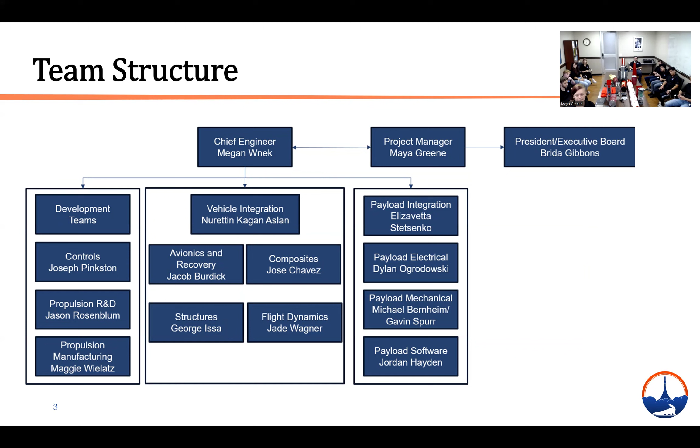Hi everyone, my name is Megan Wnek, and I am the chief engineer for our project this year. As Maya indicated, I'm the technical manager of the project. I'm going to give a broad overview of our project before handing it off to our technical leads to do most of the talking. Just to give a little bit of status on our project, we are on track with the competition to attend in June. We've submitted all of our documentation on time as well as paid our fees. We've also completed a fully integrated test flight of our entire project.

And this was largely successful. So we're currently just wrapping up a few mitigations and fixes that we needed to make following that test flight. And we are slated to be doing our final testing in the next just like few days to be ready for the rest of the summer.

All right, so to introduce our project, as Maya said, the overall title of our project, as well as our launch vehicle, is He's Right Behind Me, Isn't He? And we have a little bit of a theme from The Shining going on. Our payload's name is Here's Johnny, and the payload is a deployable chase camera, and that's where the name came from. The payload is going to essentially follow the rocket and chase it upon descent, so that's where He's Right Behind Me, Isn't He? came from.

And then along with that, we also have, as Maya mentioned, our SRAD air brake, which one of our development teams was working on this year. Again, this was a really successful project, and we flew this on our test flight, and we also are going to be flying it in competition as well.

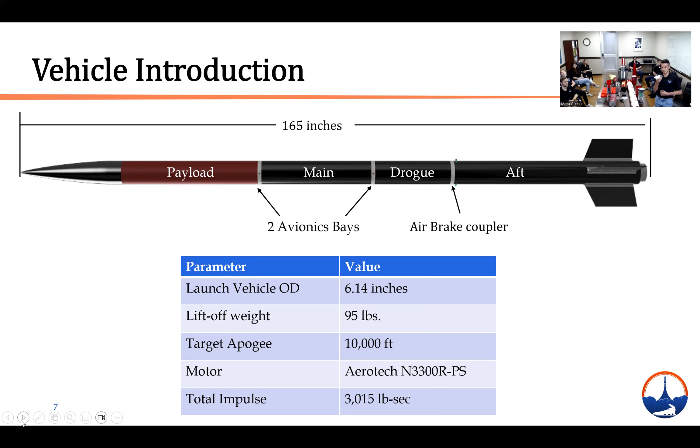Our airframes include a payload airframe, a main airframe, a drogue airframe, and an aft airframe, which are joined with 2 avionics bays and our air brake systems coupler.

For the connection points, our payload sits inside the payload airframe, and the nose cone connects to the payload airframe, creating our first separation point. We use metal rivets to create our non-sliding rigid joints.

We have our main parachute inside the main airframe that connects to the forward avionics bay with shear pins, creating our second separation point.

We have our drogue parachute sitting inside the drogue airframe that connects to our second avionics bay with shear pins, creating our third separation point.

Our drogue airframe connects to the aft airframe with the help of our air brake coupler, and it's secured from both sides with metal rivets to create a non-separating point.

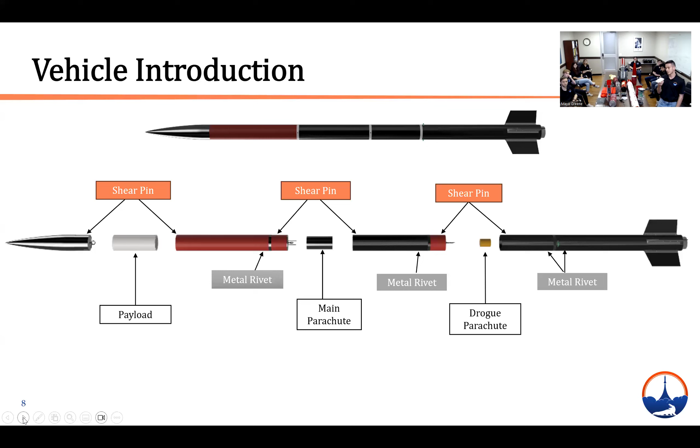We have our nose cone, which is SRAD fiberglass reinforced plastic. Our payload airframe and main airframe are COTS G12 fiberglass, and our drogue airframe, motor airframe, and fins are SRAD carbon fiber reinforced plastic.

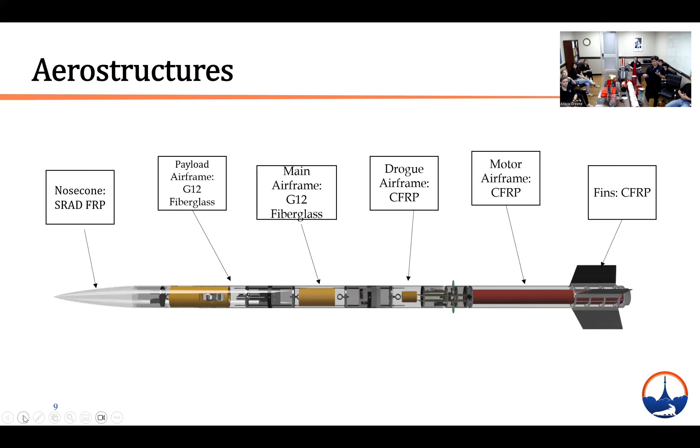Our airframes are manufactured using a 6-inch polycarbonate mandrel. They're made with carbon fiber sleeves in a 3-ply symmetric layup. The first ply is a 12K unidirectional carbon fiber sleeve, sandwiched between 2 by 3K biaxial sleeves.

It is always good practice to compress your part when curing your composite. We do this by wrapping PET flash tape around in a helical pattern, which achieves a greater fiber volume fraction and therefore greater strength in our part.

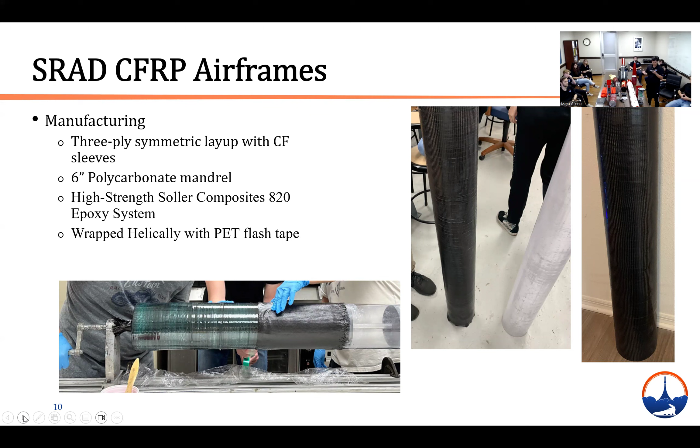Our airframes were tested using compression testing, doing a displacement control test. We applied load using a thrust ring, which represents how load is actually transferred to the airframe in flight, and an aluminum plate on the other side to distribute the load and protect the machine.

We had 2 test sections: one with and one without flaps cut out. We have flaps cut out in our aft airframe, 2 of them, where the air brake flaps will be actuated. This creates a huge stress concentration, which is why we wanted to include that in our testing.

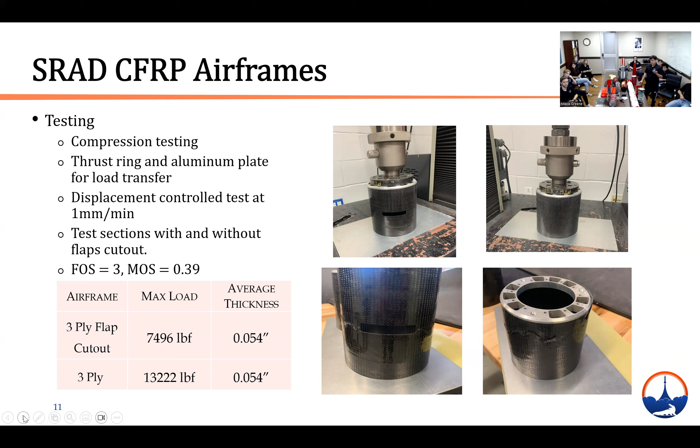Our max load for a flap cutout was around 7,500 pounds. We designed for a factor of safety of 3, and we achieved a margin of safety of 0.39.

Here is our fiberglass nose cone. We chose fiberglass for its lightweight, strength, and radio transparency. It was made using a Von Karmen 4:1 PLA mold, using 5 layers of 3K fiberglass E-glass bidirectional sleeves, wetted out with Soller Composites 820 epoxy system. This was compressed using a vacuum bag, and for post-processing we used Bondo to fill all the pinholes and sanded it to achieve a smooth surface.

Our nose cone tip here at the top was made out of 6061 aluminum, manufactured using the Haas SL10 CNC lathe.

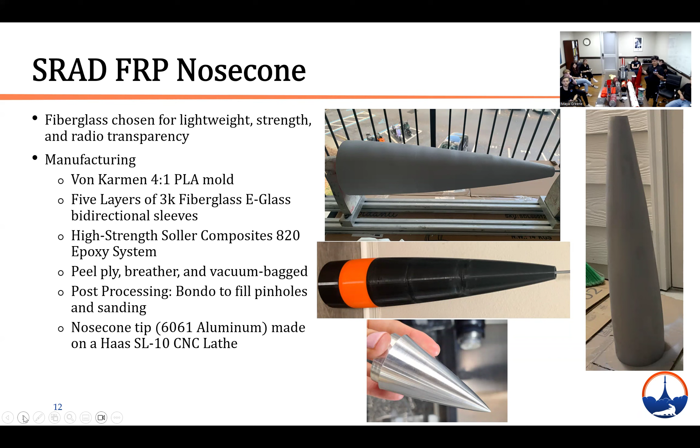Our carbon fiber fins are made using prepreg. They're right here with the aft. We use a Toray T300 250F epoxy standard prepreg; that is our laminate code right there. It has an average thickness of around 180 thou. Using prepreg, you can achieve a really high fiber volume fraction, around 60%.

We manufacture this on an aluminum tooling plate and put Teflon, then our plies, and then Teflon again. The Teflon was used just to demold the actual part so it wouldn't stick to the aluminum plate, and also to apply a smooth surface on the top and bottom. This was cured, vacuum bagged, and cured in a temperature controlled oven. All the fins were cut on a 5-axis abrasive water jet cutter.

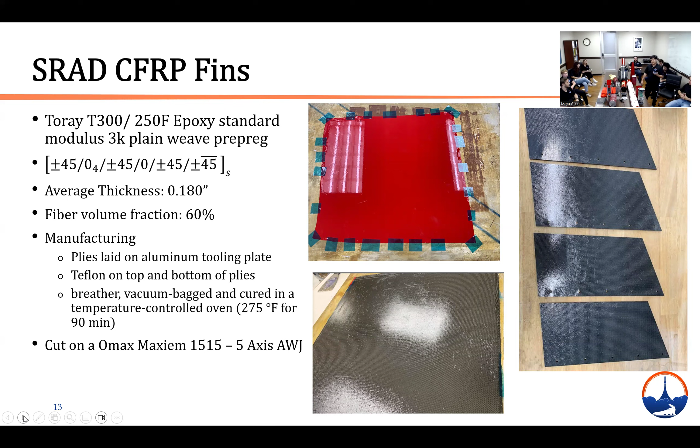So we also wanted to find the effective laminate engineering constants of our actual fins. In order to do this, we need to find the actual engineering constants of our material itself, just the one ply of prepreg.

We did this by using digital image correlation testing. We had a 12-ply 0/90 laminate, around 120 thou thick. We speckled it with white spray paint to apply a good base coat, and then speckled it with black, so that the digital image correlation can detect the strains.

We ran a coupled UTM and digital image correlation system that records data at a frequency of 2 Hertz. For our tensile testing, we followed ASTM D3039 standards. For our shear testing, it was done using shear testing procedures developed in UF's composites lab.

For our extensional modulus in the fiber direction, we achieved an extensional modulus in the fiber direction of 53.681 gigapascals, with a Poisson's ratio of 0.249, and an in-plane shear modulus of 5.287 gigapascals.

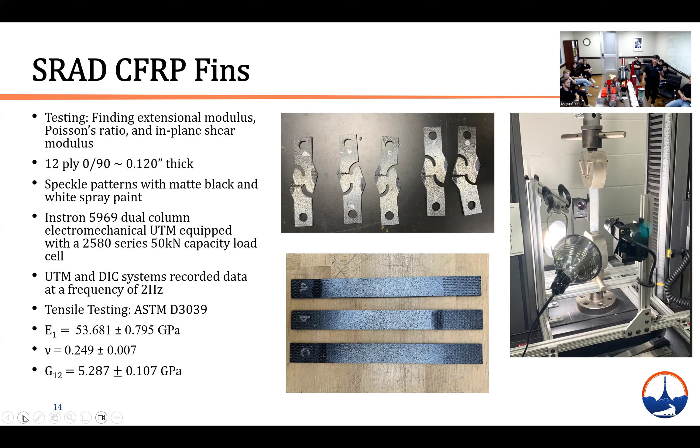Hi, my name is George Issa. I'm the structural design lead for the team this year.

One of the major projects being done on the launch vehicle this year is the design, analysis, and manufacturing of a modular aft. It's important to consider some of the disadvantages of a more traditional epoxy aft used on a rocket. The main disadvantages would be the cure time taken to produce an actual epoxy aft, which would increase manufacturing and assembly time. Additionally, cutouts must be made into the airframe during the assembly process, which would sacrifice the structural integrity of the airframe. The aim of the modular aft section is to mitigate some of those disadvantages.

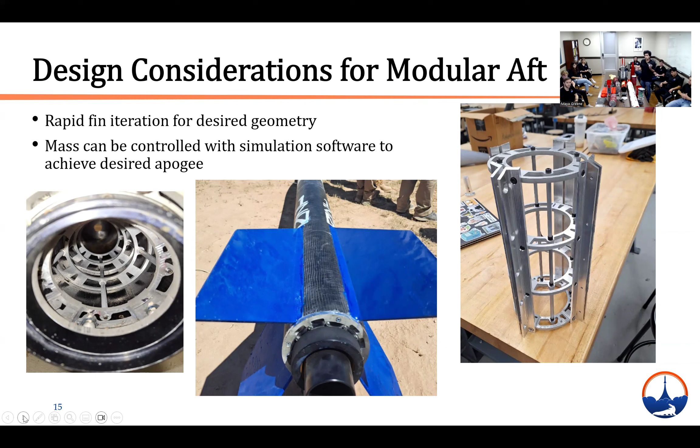So here's the design that we ended up going for. It consists of 4 centering rings that aim to center the motor and make sure any thrust transmitted by the motor is transmitted axially into the rocket. They're connected using a set of aluminum standoffs, whose main purpose is to ease the assembly process, in which all of the centering rings can be assembled and then inserted into the actual airframe to finalize the assembly process.

Another aspect of the design is the fin brackets, which you can see right here. They sit outside the airframe and fasten into the centering rings using radial holes drilled into the side of the centering rings. Finally, a thrust plate was designed and connects to the bottom of the bottommost centering ring. This is the main attachment point of the motor, in which the motor retainer screws onto the bottom of the thrust plate. Additionally, it has a shoulder that sits outside the airframe in order to better translate any loading caused by the motor during flight.

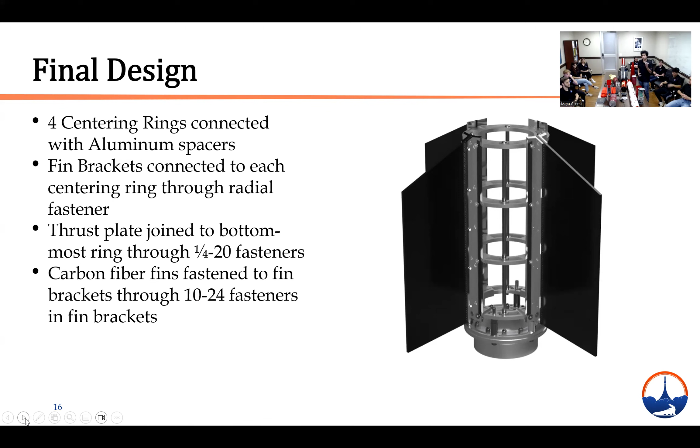The manufacturing process this year was aimed to be fully automated, in which the multiple parts could be manufactured to the desired specifications and tolerances. This was done using 3-axis CNC milling, 4-axis CNC milling, and abrasive water jet cutting.

As you can see in the picture in the middle, the fin brackets were machined out of a 1x1 inch bar stock of aluminum 6061 on a 3-axis CNC. The centering rings and thrust plate were cut using an abrasive water jet on a 1/4 inch and 1/2 inch sheet of aluminum 6061, and then any radial holes were drilled on the 4th axis of the CNC.

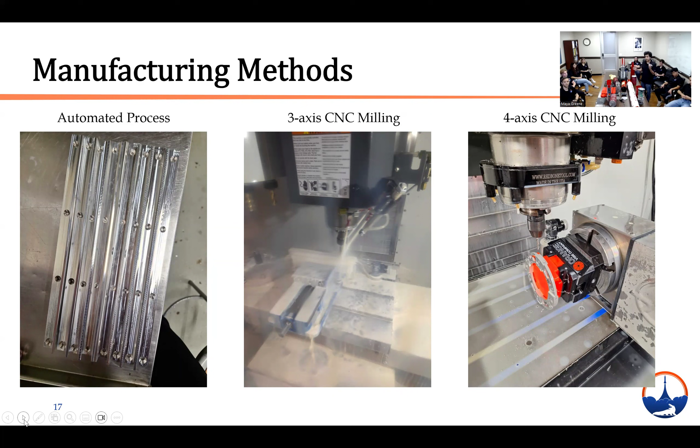Another major component of the design is the derivation of our load case, which is used to simulate any loading caused during flight. This consisted of 3 main loads, the first of which being the thrust exerted by the motor on the assembly, found by taking the maximum thrust exerted from the motor through the thrust curve.

The second major force is the inertial force, which is not an actual force applied during flight, but a way to convert the dynamic model of the rocket into a static one that could be more easily simulated. This was found by taking the maximum acceleration of the rocket and multiplying it by the initial mass.

The final force applied on the actual aft section is the drag caused during flight. This was split into 2 main components: one applied directly onto the tip of the fin, and the other applied on the side of the fin during flight. The first component of drag was found using a high drag coefficient to ensure that any drag caused during flight would not exceed the simulated drag. The second component was found by finding the drag coefficient correlated to the highest angle of attack using an Open Rocket simulation. This was found to be 5 degrees, and the side drag was found based off of that.

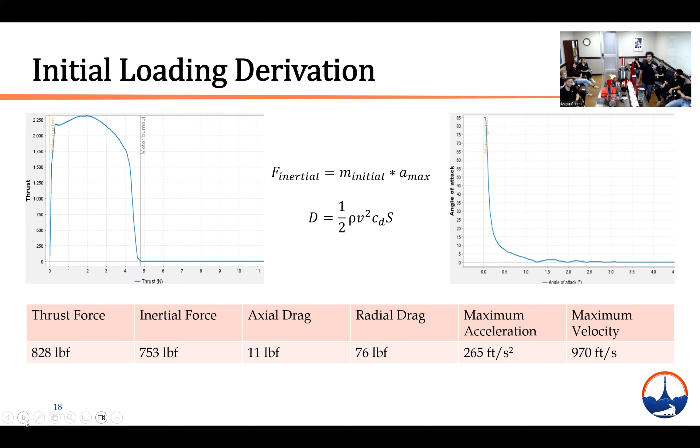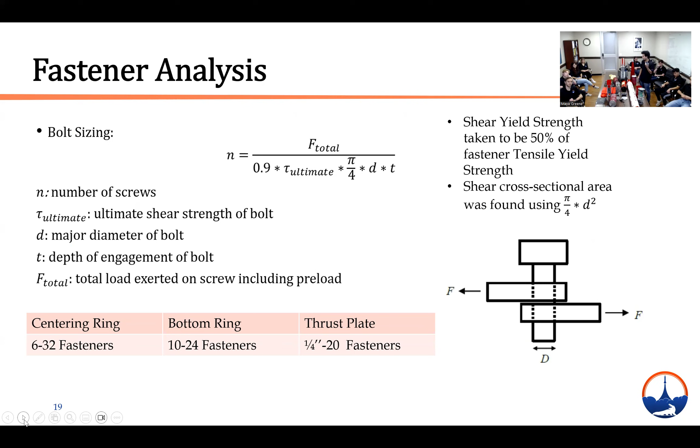Additionally, fastener analysis was conducted to ensure any loading caused during flight would not result in failure of any fasteners. This was done using the equation shown here, where the stress caused by loading on the fastener is compared to the ultimate tensile strength or ultimate shear strength of the fastener, and N is the number of screws needed to achieve a high enough area to decrease that stress and ensure it's under the ultimate tensile strength. The shear yield strength was taken to be about 50% of the tensile yield strength, and the result of this equation led us to select 6-32 fasteners for the top 3 centering rings, 10-24 for the bottom ring, and 1/4-20 fasteners for the thrust plate.

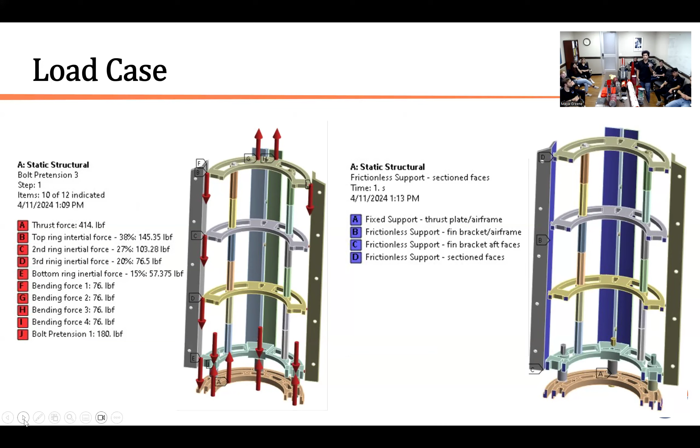Initially, the design was simulated without any weight-saving cutouts. This was mainly done to observe any regions that exhibited high stress, and this was found to be the regions of the centering rings around the radial screws. Then an iterative design approach was taken in which weight-saving cutouts were conducted, and a new simulation was assembled and the stresses were observed. This was done multiple times until a desired safety factor was achieved and the overall design was light enough.

This is the final form of our simulation. The maximum calculated von Mises stress is 26.3 KSI, which is well below the yield strength of aluminum 6061. The target safety factor was 1.1, and we achieved a margin of safety of 0.21. Finally, the total mass of the system was found to be 95.2 ounces.

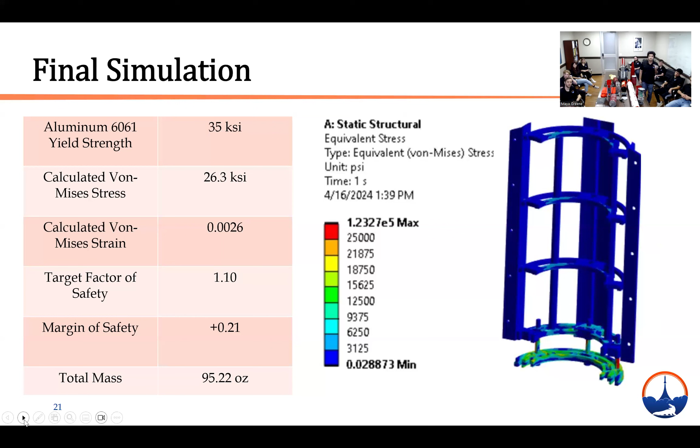Hello everyone, my name is Jacob Burdick, and I'm this year's avionics and recovery lead.

With my main job of making sure the rocket comes down safely, that's mainly achieved through the timely ejection of our parachutes. Housing the avionics that control those ejection timings, we have this here, which has three main components: the couplers, switch bands, and bulkheads. Those couplers are made of G12 fiberglass and are COTS. They're 13 inches in length, with one of those inches contributed to the switch bands, allowing 6 inches on either side to insert into both sliding and non-sliding joints.

To secure those joints, we use 3 metal rivets for the non-sliding joints and 4 plastic shear pins for the sliding joints. Our switch band is SRAD carbon fiber reinforced plastic, which was manufactured through our own layups and dremeled off of the airframes. This switch band has 4 altimeter pressure ports, which were sized based off of the altimeter manufacturer recommendations.

We have bulkheads on either side to seal it off, made of aluminum and steel, both 1/2 inch thick. They were water jet cut and then CNC milled to have a 1/4 inch shoulder, and pocketed down to 1/8 inch based on analysis of the inertial loading of the rocket during ascent. We have both aluminum and steel bulkheads to allow this top plate to be swapped out to alter the weight of the rocket, accounting for the change in altitude going from Florida for our test launch to New Mexico for our competition flight.

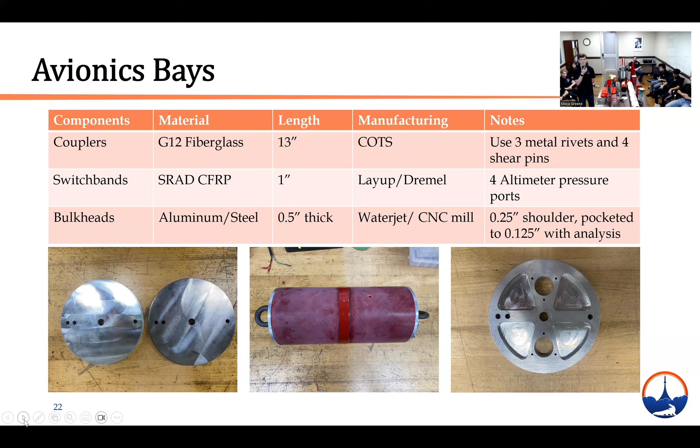Moving on to the avionics housed in those avionics bays, we have our SRAD flight computer, which this year will only be data logging. We also have 4 COTS altimeters. Additionally, we have a TeleGPS housed in the nose cone in this coupler, fastened onto a PVC bulkhead which was epoxied in. That TeleGPS is then fastened onto that bulkhead using a 3D printed bulkhead as well. Our 4 COTS altimeters are a Stratologger CF, 2 MissileWorks RRC3s, and a Blue Raven.

Our aft avionics bay controls both drogue and main parachute deployment. The primary altimeter is the Stratologger CF, so the drogue channel fires at apogee, with the main channel firing at 1,000 feet. The backup is the RRC3, which fires the drogue channel at apogee plus 2 seconds, and the main channel at 800 feet. Our forward avionics bay controls payload deployment, with the RRC3 as the primary altimeter, meaning it does not fire anything at drogue, and its main channel fires at 1,250 feet. The Blue Raven is the backup and fires at 1,100 feet.

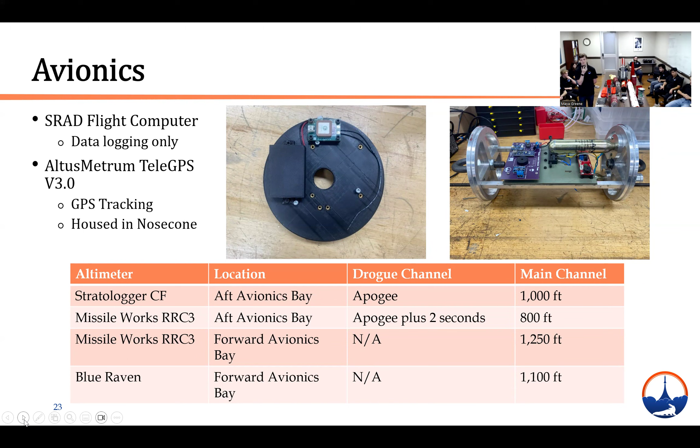More on our SRAD flight computer: the electronic components we chose were the Arduino Nano, BMP390, MPU 6050, and an SD card module. One thing to note is the MPU 6050 will no longer be included, as we encountered stability issues running the code, and after 60 seconds it would stop running. The only case we used the MPU 6050 was for launch detection, to allow for redundant detection accounting for both altitude change from the BMP390 and acceleration from the MPU 6050. This was then changed to only account for altitude change from the BMP390, using an altitude arming threshold.

So more on that software logic: in our setup, we account for the altitude and take the mean, then offset the following altitudes based on that mean, giving us an above-ground-level altitude reading. After this, we begin looking for launch detection, which is detected through an arming altitude. This takes the last 20 samples of data, sampled at 20 hertz, so the last second of data. If all of those readings are above 300 feet, we have detected launch.

Once we detect launch, we apply an offset of 5 seconds to account for motor burn and acceleration, so we don't get false detections of apogee. After that 5 seconds passes, we begin looking for a decrease in altitude, which indicates apogee. Following that, we look for our main altitude, a preset parameter based on what we choose, housed in the forward avionics bay which controls payload deployment. This was set to 1,250 feet, simulating it acting as the primary altimeter. This was flown on our test flight and was successful, staging all the correct components at all the correct timings.

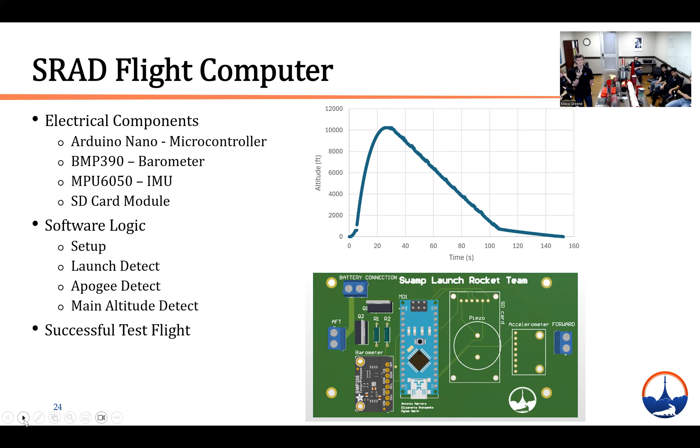We also have a SRAD CO2 system to deploy our payload. We use this because it uses cold gas and has no ejection residue, which is important compared to black powder, which we use for both main and drogue deployment, since it does not pose a risk to the precious electronics on the payload and ensures its mission is safe with no risk from the ejection system.

The mechanism that controls this uses a small amount of black powder to propel the puncture piston into the seal of the CO2 canister. Once the seal breaks, the return spring brings the puncture piston back to the top position, allowing the gas to escape. It travels through the relief holes on the canister mount and into the airframe, pressurizing it and allowing the nose cone and payload to come off. This was mainly manufactured using a lathe, and we used a mill to drill out any of the non-concentric holes. Based on the spring constant of the return spring, this is rated for 200 plus Gs, accounting for the acceleration loadings that could cause the puncture piston to prematurely puncture the CO2 canister.

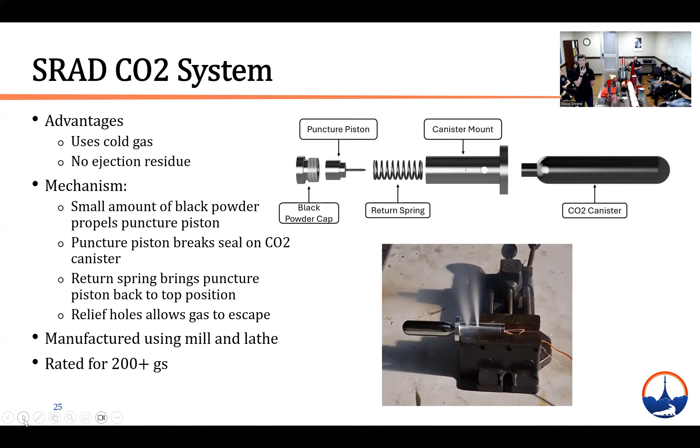Our recovery layout follows a sequence of eye bolts, D-links, shock cord, and swivels to connect our avionics bays, our parachutes, and our payload sabot. We follow a dual deployment recovery method where we have a drogue parachute, which aims to reduce drift and controls the maximum deployment force of the main parachute, with that main parachute controlling the ground hit velocity.

This year, we used 2 drogues. The 3-foot standard with a coefficient of drag of 0.97 was used in Florida for our test flight, and that brought a descent rate of 106.6. However, with this fast descent rate, we experienced severe zippering of our main parachute, which led us to use a 3-foot elliptical with a coefficient of drag of 1.6, bringing our descent rate to 83 feet per second to reduce that risk of zippering.

Our main parachute remains the same as what we used for our test flight, which was a 10-foot Iris Ultra with a 2.2 coefficient of drag, bringing our main ground hit velocity to 19.2 feet per second.

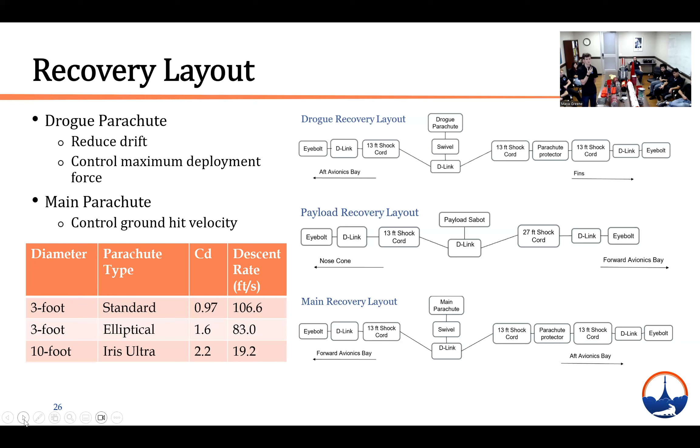Some more on the recovery force we experience: this is experienced from the main parachute deploying at drogue velocity. To account for the fill time of our main parachute, we have a shock factor of 0.9, gathered from OSCALC to account for this fill time. Based on this loading, we then include a safety factor of 1.5 to bring our design force to 3,000 pounds of force upon main deployment.

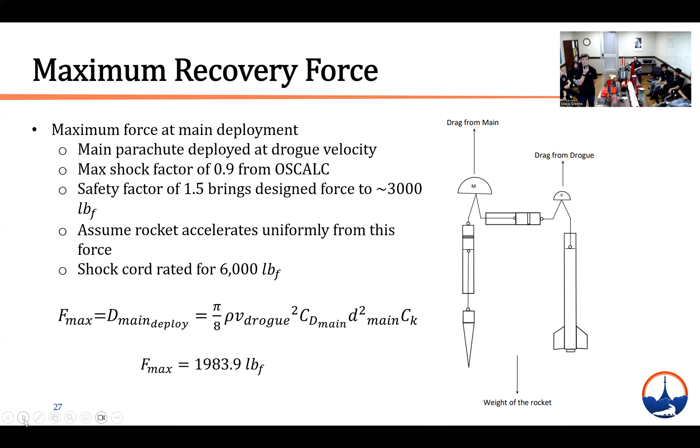To distribute this loading into the rocket and all the eye bolts and D-links, we assume the rocket accelerates uniformly from this force. So any of the weights being held by this component can then be multiplied by acceleration to find this force. Using this force, our minimum factor of safety is 1.5 for all of these components. Additionally, our shock cord is rated for 6,000 pounds, to account for any knots that are needed to tie, which would reduce this strength.

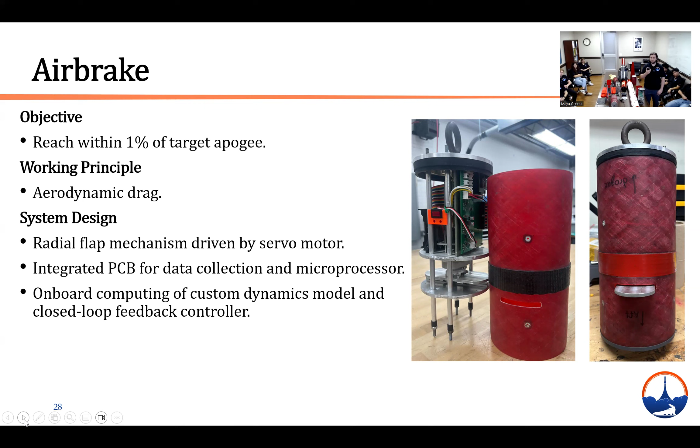At a system level, our design consists of radial flaps that are driven by a servo motor mechanism. We utilize an integrated PCB with sensors for both data collection and a microprocessor to drive our software. Our software utilizes onboard computing of a custom dynamics model, which allows us to solve for actuation through a closed loop feedback controller in real time throughout flight.

Our air brake system, seen here and shown actuating in the video, consists of 2 bays: an electronics bay at the top and a mechanism bay shown in the middle. These 2 bays isolate the systems from each other, allowing for assembly of the two together.

Our mechanism consists of a pair of inline slider crank mechanisms. This system consists of a cam drive in the middle, connecting with 2 connecting rods on the ends. This ensures that our system actuates the flaps at the same distance from the exterior of the airframe, reducing any chance of inducing a pitching moment on the launch vehicle.

The system is driven by a high torque servo motor, which has a factor of safety of 1.95 of its stall torque, derived from maximum actuation of the air brake system along with maximum vertical velocity of our launch vehicle. The system leads to an overall increase in launch vehicle cross-sectional area of 21%, driving our increase in aerodynamic drag.

The electrical design of the system consists of an integrated PCB shown to the right. This system utilizes both a barometric pressure sensor and an inertial measurement unit, which allow us to calculate the state of the launch vehicle throughout flight, namely our altitude, velocity, and pitch orientation. We utilize a Raspberry Pi 4 Model B microprocessor, chosen for both its computational capabilities and its open source libraries that allow us seamless integration with our sensors.

For the power supply, we use three 18650 lithium-ion cells, which provide us with 12 volts of power. Our sensors run off 3.3 volts, microprocessor 5 volts, and our servo motor 7.4 volts. Thus, our system has 3 linear voltage regulators that downregulate the 12 volts into the 3 respective power lines.

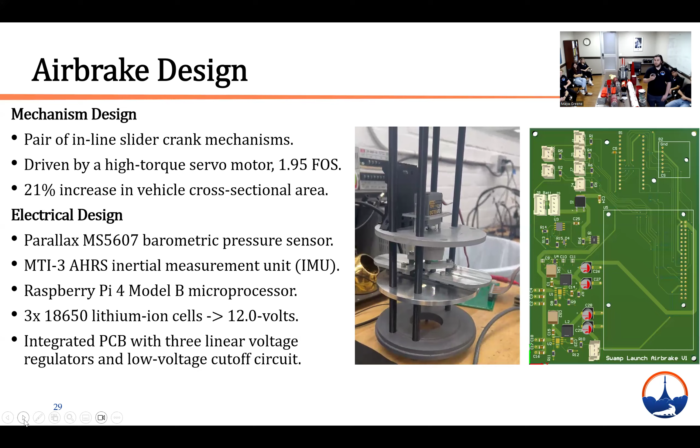Finally, our PCB also utilizes a low voltage cutoff circuit. This ensures that if the power system drains below 9 volts, no more current will be provided to the PCB, ensuring that we do not drain our lithium-ion cells below their rated voltage.

This is because, as George mentioned earlier, our modular aft utilizes fin brackets, which have a complex geometry that cannot be modeled easily in open rocket. Thus, our dynamics model has an overall higher aerodynamic drag on the launch vehicle.

Finally, we use this dynamics model to then drive the design of our controller, which is a proportional integral closed-loop feedback controller. The main design considerations for this controller were both to minimize overshoot and steady-state error.

Since our system is an under-actuated system, we are only able to reduce the apogee of our launch vehicle. However, if we overshoot, we have no way of getting that altitude back. We also include an integral term to eliminate any steady-state error, allowing us to refine our final apogee.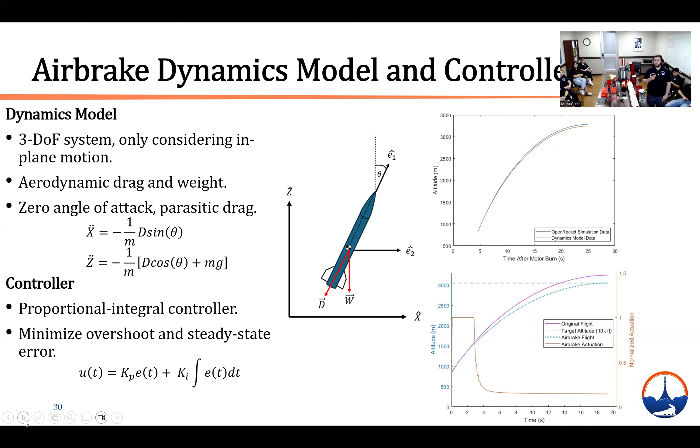The air brake system software can be broken up into 6 states that chronologically follow the flight profile of the launch vehicle. Through an external arming switch that we utilize on the air brake, we can arm the air brake system on the launch pad.

This then enters the software into the pad state, which will actuate the air brake system to full extension and then back to its home position. This provides the arming team with a visual cue that the system has been powered on and is operating nominally.

Then we switch over into our arm state. In the arm state, we run a ground calibration software that will calculate our ground pressure and ground temperature that is later utilized to calculate our altitude throughout flight.

We also run our launch detection algorithm. Once the motor has fired for our launch vehicle, our launch detection algorithm will pass and transition us into our launch detected state.

During the launch detected state, we run a motor burn timer plus a 1/4 second delay. This ensures that we do not actuate our system while we are under powered flight. Throughout this time, we are also calculating the state of the launch vehicle through our sensors, namely the altitude, vertical and downrange velocity, and the pitch orientation of our system.

Once that motor burn timer has completed, we switch over to the actuation state, which is the coasting ascent phase of flight and also the area in which we actuate our air brake. During this time, we take the state of the launch vehicle, pass that into our dynamics model, solve for a predicted apogee at each loop of the controller, and solve for air brake actuation signals in real time.

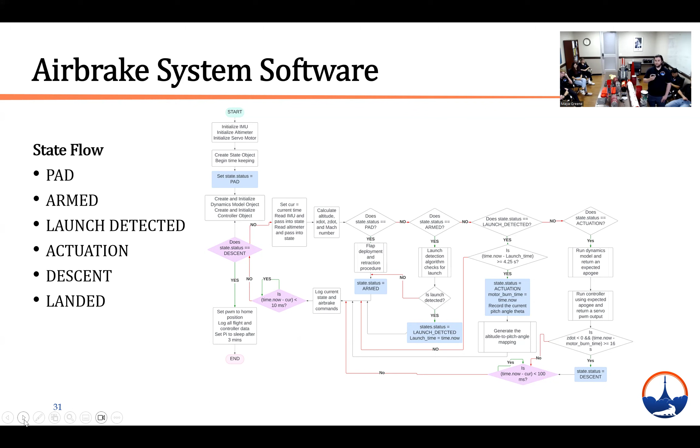Finally, once we reach apogee, we transition into our descent state, which is simply us logging all of our sensor data throughout descent. Upon landing, we log all of our data to a CSV file and end the execution of our software.

Hello everyone, my name is Jade Wagner, and I'm the flight dynamics lead for this year, which focuses on motor selection and full flight simulation.

The motor selected was chosen to optimize 3 competition requirements: the margin of stability off the rail, the thrust-weight ratio, and the velocity off the rail.

The margin of stability off the rail and the thrust-weight ratio meet competition requirements, and the velocity off the rail was below competition requirements, and therefore a test flight was done to prove flight safety.

The motor chosen was selected to have an apogee between 10,500 feet and 11,000 feet, as the simulation was with the air brake not deployed, and the air brake would decrease apogee by 500 to 1,000 feet. Therefore, an N motor was selected.

Through the design process, as the launch vehicle was updated, the final motor selection was the Aerotech N3300R-PS, with a total impulse of 14,041 newton seconds, an average thrust of 3,168 newtons, and a thrust duration of 4.4 seconds. The motor will be housed using all Aerotech motor hardware, and a RocketPy visual graphic of our COTS motor is shown at the top, and its thrust curve is shown at the bottom.

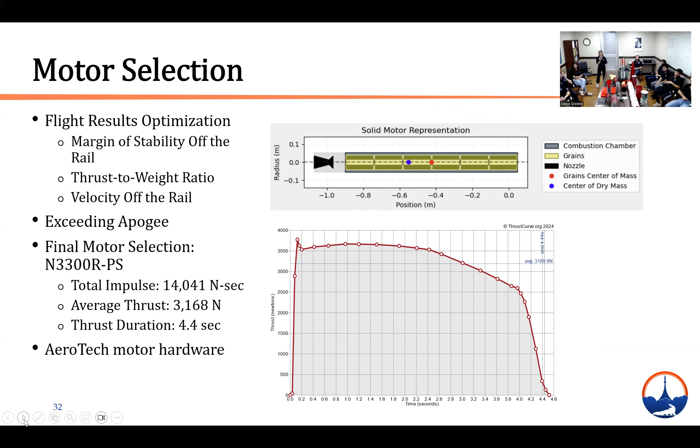The flight profile was done using 3 different simulations: OpenRocket, RASAero, and RocketPy. OpenRocket was used for its full flight profile and its ease in updating individual components. However, OpenRocket overestimates drag when coming close to Mach numbers of about 1.

So RASAero was introduced as it uses experimental data in its calculations and has the ability to add protuberances to the launch vehicle, which was added to account for the fin brackets on the modular aft section. However, RASAero does not account for an air brake in its simulation, and therefore a RocketPy simulation was introduced to account for air brake actuation during flight.

Furthermore, RocketPy has the ability to introduce a drag curve using CFD data, which was introduced as an initiative for future years in the Spaceport competition.

As mentioned before, a flight test was done, and the apogee was measured in 3 different ways: the air brake flight computer, the TeleGPS, and the SRAD flight computer, as the COTS altimeter was damaged due to water damage in flight. And therefore, the measured value is an average of these 3, being 10,424 feet.

This can be compared to the 3 simulations used, and RASAero was proven to be the most accurate for apogee calculation. And therefore, it will be used for the majority of the calculations of the launch vehicle for the competition.

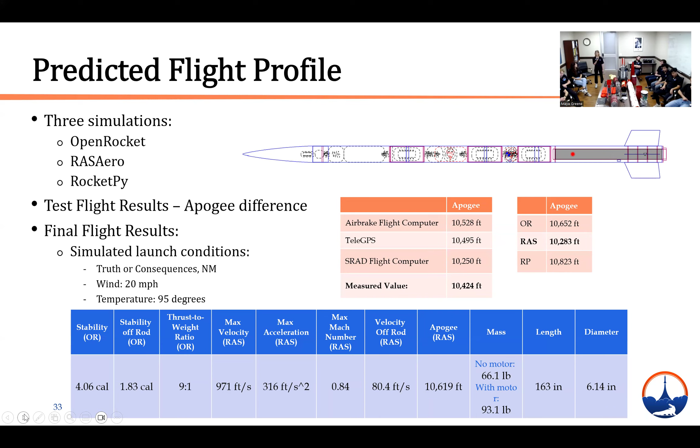Our payload for this year is a 4U CubeSat chase camera that will be deployed from the rocket at around 1,250 feet. The payload will be deployed via a cold CO2 ejection to prevent damage to any of the electronics and other critical components in the payload, and a sabot will be used for the safe deployment of the payload.

The mission for this year's payload is to track and take a video of the launch vehicle descending upon the main parachute by automatically moving a camera that is at the bottom of the payload. This video will be live streamed to a ground station.

In addition to the deployed payload, there will be a separate data transmission unit within the nose cone, and this data transmission unit will start transmitting the rocket's positional and altitude data to the payload.

With this positional and altitude data, the payload can orient itself to take a video of the descending rocket by using the steel flywheel that is inside the payload, to rotate the payload towards the launch vehicle along the roll axis, and also using a servo to pitch the camera for vertical tracking of the launch vehicle.

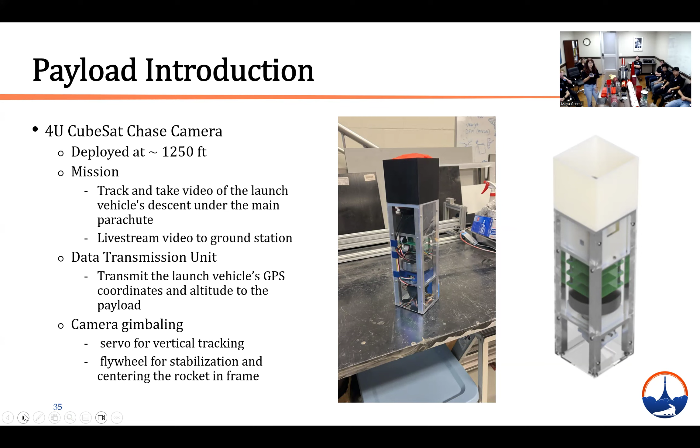Hello, my name is Gavin Spur. I am the payload mechanical lead for this year.

To begin, I would like to walk you through the payload modules. As you can see in the render and in the actual payload next to me, at the very top we have the parachute box. Below that, we have the battery module. Below that, we have the PCB stack up. Then finally, below that, we have the flywheel module. And at the very, very bottom, we have the camera module used for tracking the rocket.

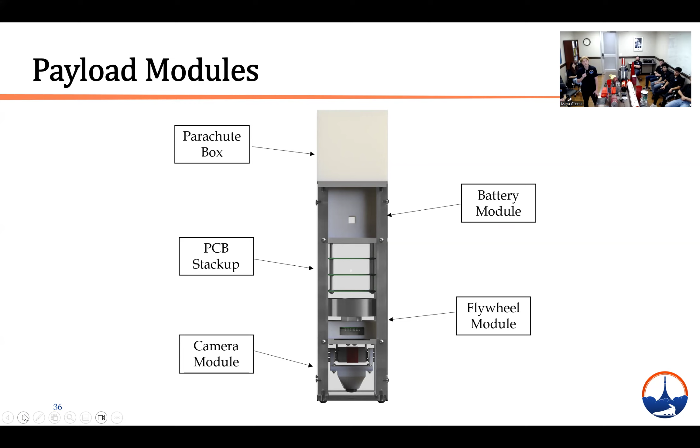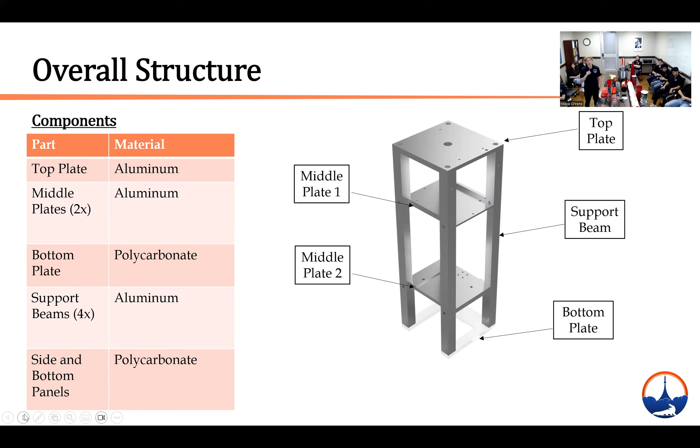As far as the overall structure of the payload goes, it consists of a top plate, 2 middle plates, 4 support beams, and a bottom plate. The top plate, middle plates, and support beams are all made out of aluminum for their desired strength, as well as ease of manufacturability. They provided us a balance between intricate design as well as structural components. The bottom plate is made out of polycarbonate to ensure that the camera can see through the bottom and see our rocket during descent.

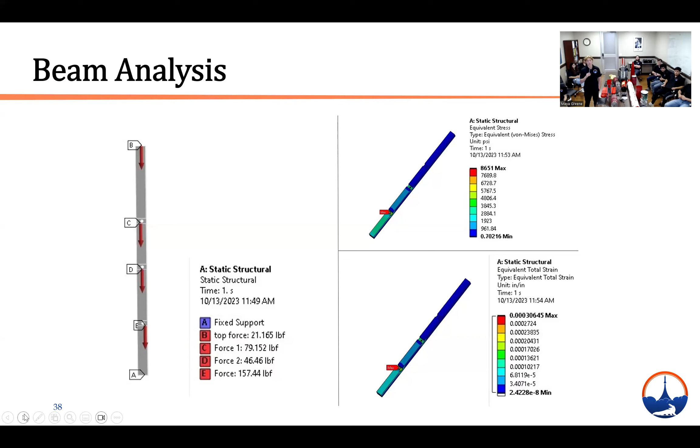To ensure the structural safety of the beams, we conducted analysis on the expected load. As you can see on the left, the expected load from the plates is acted upon the beam. On the right, we have the stress and strain results. As you can see, there are no troubling readings. Therefore, we deem the beams to be structurally safe for the duration of our flight.

Now going into the modules, at the very, very top we have the parachute box. This module consists of a PETG parachute box, a PETG GPS holder, and a half 13 eye bolt made of steel. The parachute box and GPS holder were made out of PETG for weight constraints, as well as the fact that the GPS housed in them may not touch metal, to ensure the readings are transmitted to us on the ground station. To talk about the GPS, the functional components are an Eggfinder GPS and a 5-foot Rocketman elliptical parachute that is used for recovery and attaches to the eye bolt.

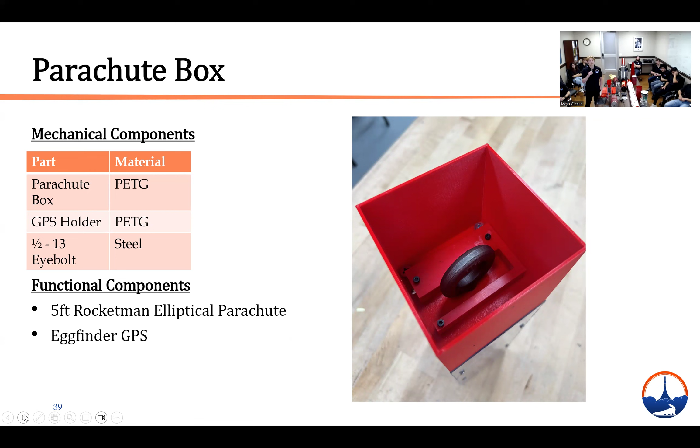Right below this parachute box, we have the battery module. This module consists of a battery holder made of PETG, a battery buffer made of PETG, and 8 18650 lithium ion cells. These are both made out of PETG for ease of manufacturing, as you can see, the design is very intricate to allow wires to pass out. Therefore, 3D printing was deemed to be the best way to manufacture this very intricate and complex part. As you can see with those holes, the wires are able to seamlessly exit, and there's no issue with the battery getting power to the rest of our systems.

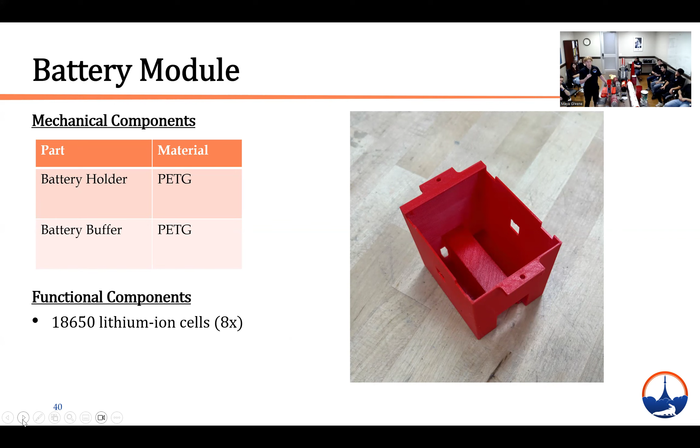Next below the battery module is our actual PCB stack up. From an electronic standpoint, our electronics lead Dylan will get more specific with the components of each board later. However, from a mechanical standpoint, it consists of 24 PETG spacers and M3 by 0.6 standoffs. The purpose of the spacers is to ensure that the aluminum standoffs do not short circuit the boards or cause any issues with the electronics. This ensures our PCB signals reach all of our functional components throughout the rest of the systems used to track the rocket.

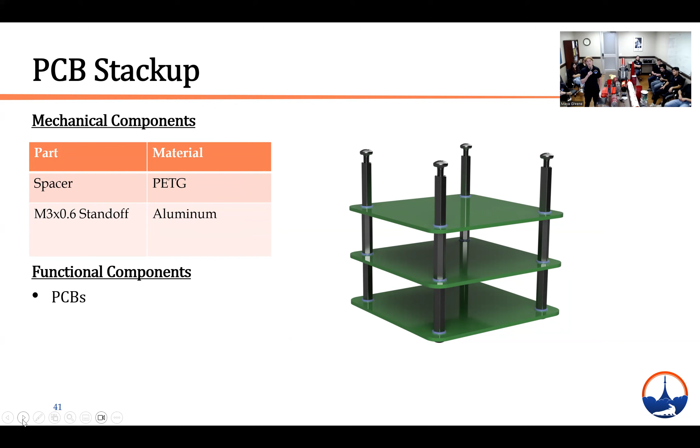Below the PCB, we have the flywheel module. This consists of the flywheel, the bearing mount, a 624 2Z ball bearing, a motor mount support, and a motor mount. This entire system is used to support the flywheel and a brushless motor that can spin up to 6,700 RPM and has an impulse of 0.74 Newton seconds.

Our flywheel was CNC'd and is made out of steel because of the weight properties. To reach the needed inertial values to actually rotate this payload whenever it is descending, the weight of the flywheel is very needed. Therefore, nothing like aluminum or any other material could be used. Because of its weight, however, this system is made of 4 other parts: the bearing mount, the ball bearing, motor mount support, and the motor mount itself. The bearing mount and the ball bearing are made to ensure that the shaft of the motor does not deflect during descent due to any radial forces the flywheel may exert.

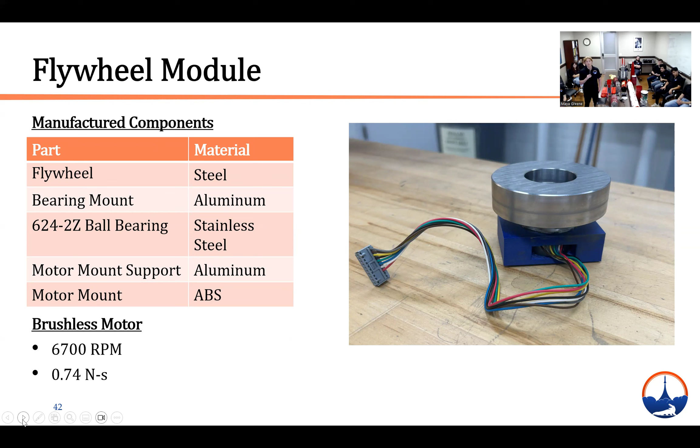The motor mount support is then epoxied into our ABS motor mount. This is to ensure that the ABS plastic, which would have otherwise been carrying most of the load, does not carry most of the load. Instead, the epoxy and aluminum take on most of the load, therefore increasing our chance of no failure or anything wrong with this module due to the weight of the flywheel.

Finally, at the very bottom, we have the main goal of the payload: the camera module. This camera module consists of a servo bracket made of PETG, a camera buffer, and a camera holder. The functional components of this module are a Mista FPV camera and an RC servo RDS 3218. The servo has a 270-degree range of motion, allowing for adequate pitch correction whenever we are trying to track the rocket during descent.

This servo bracket and camera holder are made custom because the camera does not fit perfectly with our servo. So to ensure seamless integration, a custom bracket and holder were made of PETG for their intricacy of the mold itself, having to fit the exact geometry of the camera.

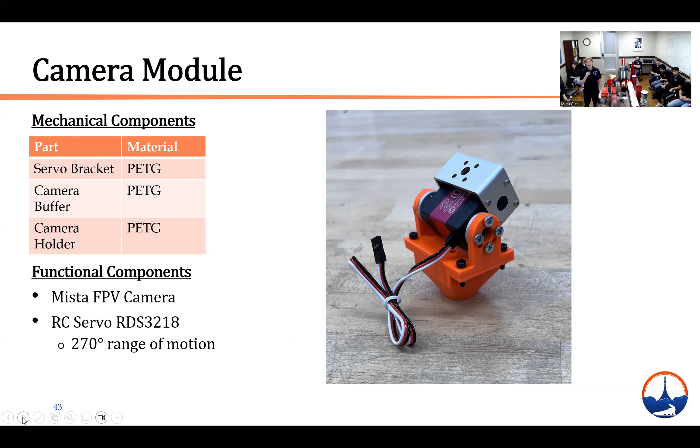Hey, I'm Dylan Orodowski, the payload electronics lead.

Here we have a block diagram of our electronics system. As Lisa mentioned before, we have three major subsystems: a data transmission unit, which stays fixed within the rocket, a CubeSat, and a ground station.

Our data transmission unit consists of two PCBs, both SRAD: a primary processor PCB and a coprocessor PCB. The CubeSat uses an identical copy of those two PCBs, as well as a brushless motor driver PCB.

In addition to our SRAD PCBs, we have an Eggfinder GPS, used only for recovery purposes of the payload, and we have a camera and VTX system to transmit our video feed.

Our ground station is solely for displaying this video feed. So we have an RCA video receiver, which we then convert to HDMI and send to a video capture card to record the video, as well as an HDMI output to display it in real time.

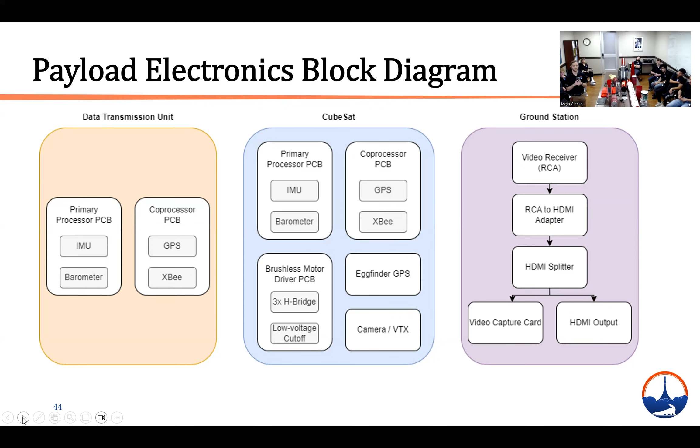We have three SRAD PCBs, the first of which is a primary processor PCB. This contains an STM32 digital signal processor operating at 550 megahertz, as well as a 9-axis inertial measurement unit and a barometer, as well as an SD card reader for data logging.

Our coprocessor PCB contains an ATmega, an XBee radio transceiver, and a GPS.

The reason we're using two different processor PCBs is so that we can get the computational throughput of the STM operating at 550 megahertz, while still being able to flash Arduino firmware onto our coprocessor, giving us access to existing firmware libraries. This gives us both computational throughput and ease of software development.

Finally, we have our brushless motor driver PCB. This contains three H-bridge motor driver circuits, as well as a low voltage cutoff to cut power to our battery system at 9 volts.

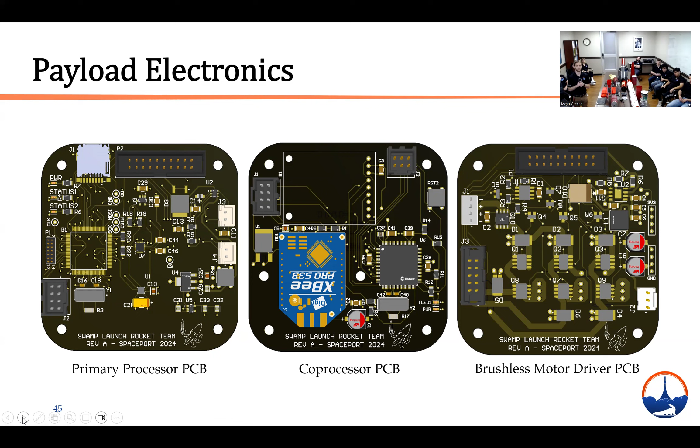For telemetry, our CubeSat has three transmitters. We have one 250 milliwatt S3 Pro transceiver operating on the 900 megahertz band. We have a KC02 600 milliwatt VTX transmitter operating on the 5.8 gigahertz band.

This is sending our video feed. And finally, we have an Eggfinder GPS transmitter, also on the 900 megahertz band, that is being used to transmit the CubeSat's location back to our ground receiver.

On the data transmission unit, we have one XBee S3 Pro transceiver that is transmitting the launch vehicle's location to our CubeSat for tracking purposes. For our camera, we are transmitting at a 600 TVL quality.

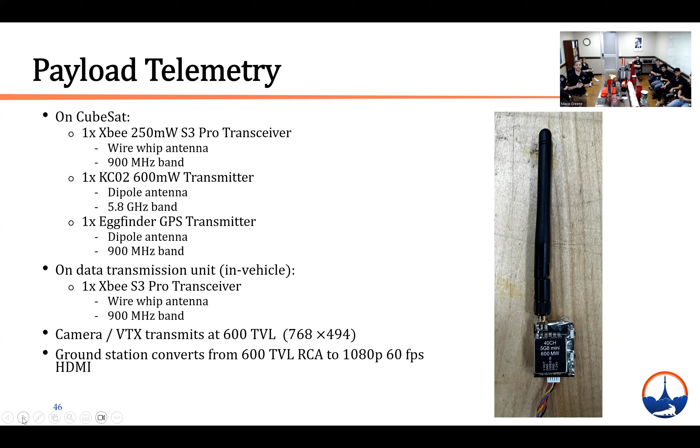This corresponds to 768 by 494 pixels. Our ground station then upsamples this and converts it to 1080p, 60 FPS HDMI output.

For our power system, we are using 18650 lithium-ion cells on our CubeSat. Each cell has a current capacity of 3,500 milliamp hours with an 8 amp current output rating, and these are configured into a 6S and 2S pack.

On the data transmission unit, we have a single 2S pack of 18650 lithium-ion cells. For our battery durations, we are expecting 9 hours on our CubeSat 2S pack, 29 hours on our 6S pack, assuming motor is idle, which it will be for the duration of flight, and 10 hours on our data transmission unit.

Hi everyone, I'm Jordan Hayden, the payload software lead, and I'll be talking about how the mechanical aspect and the electrical aspect were integrated in our software code.

For this project, we wrote two codes, one for the primary board and one for the coprocessor. The primary board used the STM32 Cube IDE library, written to the STM32H725VGT3 processor. This code comprises all of the code for the IMU integration, the barometer to get the pressure reading, SD card for data logging, the servo motor for tracking the vertical pitch of the rocket, as well as the flywheel to control its orientation.

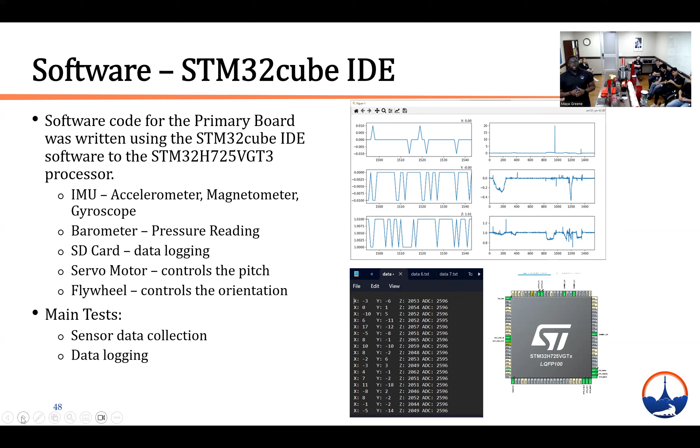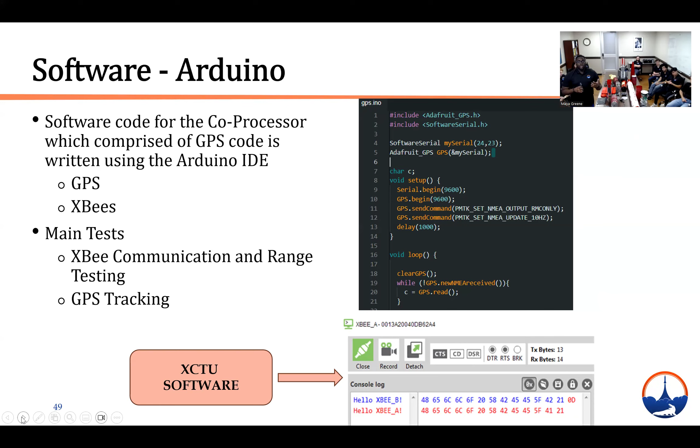Additionally, we wrote to the Arduino for the coprocessor, and this code primarily just gets the GPS reading as well as the XBee reading from the coprocessor of the rocket and transmits that to the payload so that we can do further data testing. We use the XCTU software to do XBee communication and range testing, and this was successful.

For the general flow chart overview of everything: upon power up, a red LED will indicate that power is going to the circuit. Before data logging begins, the payload will be in an idling stage. At this stage, we get readings from the IMU and the pressure sensor, but we will not be storing this to the SD card.

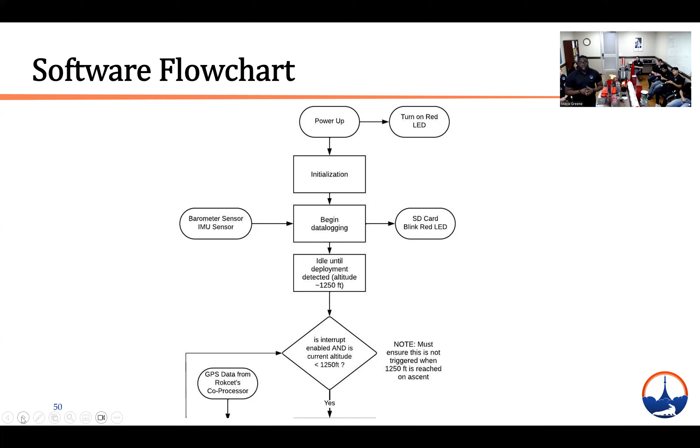This will not happen until the payload is ejected at 1250 feet, detected by the IMU reading as well as the pressure reading from the barometer. When this is detected, the GPS coordinates from the rocket will be sent to the payload, and at that point everything happens in a control feedback loop system.

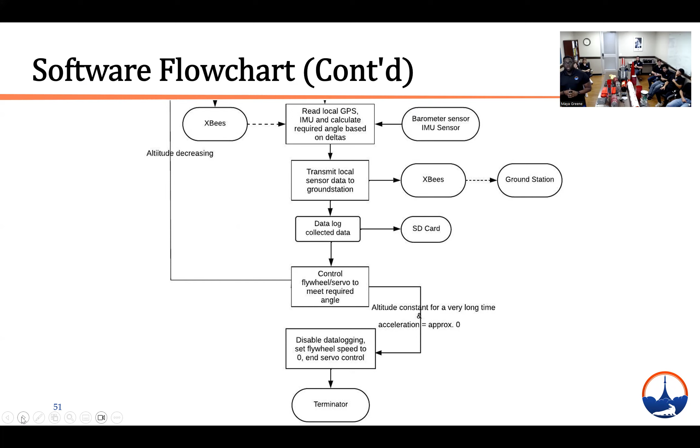The servo motor will do vertical tracking of the rocket, and the flywheel will control its orientation to ensure the payload successfully tracks the vertical descent of the rocket. We will also do live streaming sent to the ground station, as mentioned by Dylan earlier. The control loop system continues until the payload has landed, at which point data logging stops and everything ends, indicating our mission was successful.

Hello again. I'm going to now talk about payload recovery and retention.

As shown in the table, we selected a 5-foot Rocketman elliptical parachute because of its coefficient of drag of 1.6. This gives us a descent rate of 16.5 feet per second. This is important because it allows the bottom of our payload to be above the rocket during descent, as the rocket descends at 19.2 feet per second.

For the actual retention of the payload, we utilize a 3D printed sabot. The first one I'll show is our old tested sabot, made out of PETG, containing 4 sides, a bottom ring, 4 Kevlar shock cords, and 2 D-links. It's a bit messy from the test flight, but as you can see, the dangling sides are held together by shock cords tethered by a D-link at the top, ensuring these sides do not release from the rocket and fall into free space during ejection.

A clean new version was also made with the same functionality. For a better look at our bottom ring, it is a 3D printed ring with pegs, and these pegs house the 4 sides shown in the picture.

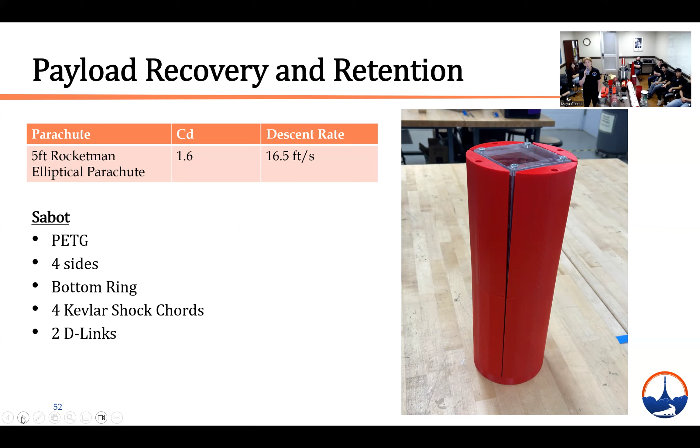The sabot is cylindrical, mocking the airframe. Its diameter is 25 thousandths of an inch less than the airframe to allow for sliding. It's placed into the forward airframe, slid in with D-links connecting it to the nose cone and to the CO2 ejection system, allowing it to be shot out and successfully protect our payload during ascent.

I'll go over a brief concept of operations for our payload. Initially in the ground state, the payload is powered on, assembled, and integrated, with power-on confirmed through a blinking LED on one of the PCBs. The sensors then continuously check for launch, and the payload remains in an idle state.

During vehicle launch, the sensors detect launch and start logging data to an SD card. During drogue descent, the payload is still waiting for ejection at 1,250 feet.

During payload deployment, the payload deploys and the servo and flywheel are activated. At this point, the data transmission unit in the nose cone transmits the rocket's positional and altitude data to the payload.

During payload descent, the payload completes its mission, transmitting a live stream of the rocket's descent on the main parachute to the ground station. The servo and flywheel also allow for vertical tracking and orientation of the payload during this mission.

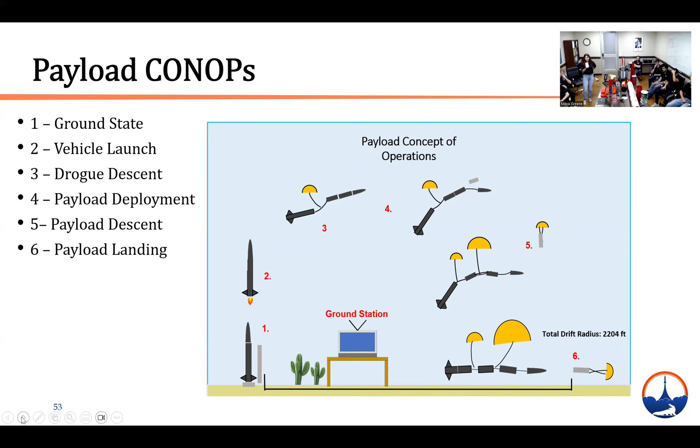During payload landing, the sensors, data logging, flywheel, and servo are all disabled, and the payload completes its mission.

Hello again. So as our leads have hinted so far, we've had a fully integrated test flight before this presentation, and our chief engineer will get into some of our findings later on. However, before the test flight, we had some ground testing done to the vehicle where we tested the ejection of

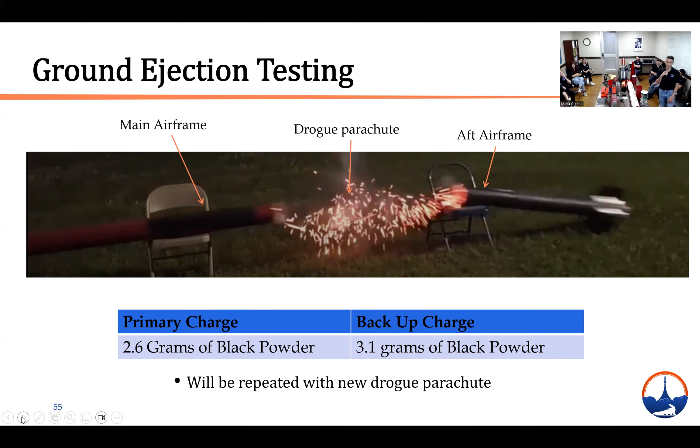the parachutes as well as the payload, where we integrated the launch vehicle fully and put 2.6 grams of black powder into the drogue airframe and then ignited the charge to see if the parachute would deploy successfully, which was successful. However, we'll be repeating this test before the competition flight due to the fact that we've changed our drogue parachute since the test flight.

And we've also done a payload ejection test with the CO2 system, where we use a 25-gram CO2 canister. This resulted in the nose cone separating successfully and the payload deploying not fully, but we thought this was fine before the test flight. However, after our findings during the test flight, we wanted to up the CO2 canister charges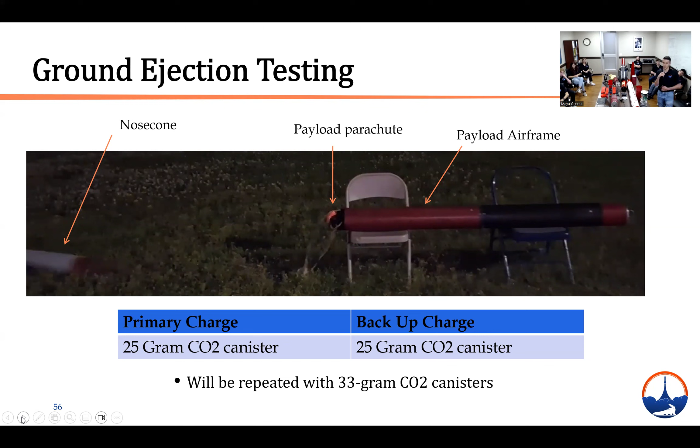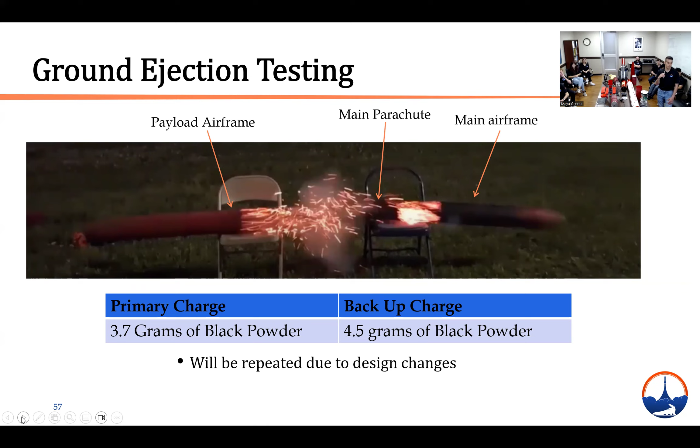to 33 grams, and we'll be testing this again before the competition flight as well. Also, the main parachute deployment test was done with 3.7 grams of black powder, and this also was successful, where we had successful separation and parachute deployment. However, we'll be repeating this test as well due to the fact that we've changed our main airframe, which was severely zippered during the test flight.

All right, hello. So to kind of wrap things up, I am going to talk about our test flight, just kind of overall generally. So we've hinted at it a lot. We did do a fully integrated test flight just around a month ago on March 30th. I'll talk through sort of what went well, what didn't go well, and what we've done since then.

We saw a fully successful ascent of the rocket. The modular aft system worked as was simulated. We saw no failures there. No failures to our aero body during ascent either.

Our air brake system proved to data log successfully and overall operated successfully. There was some minor issues with the software at the time, so it didn't actuate fully, hence our apogee still being over 10,000 feet, but overall was successful, and we're able to fix that, and we'll still be aiming for that higher apogee that the air brake will bring down during the competition flight.

We started to run into some issues during our descent. We did see successful drogue deployment. Payload deployment, however, we saw the payload section deploy, but quickly saw that our payload had separated from its parachute, and it ended up descending at terminal velocity and was not able to be recovered.

However, as you can see, we have it here because we did rebuild it in the month following the test flight. So we're still going to be flying the same mission that we originally planned. We did make some tweaks to it. However, Gavin talked about reorienting it in the rocket. That's one thing that we're doing differently so that the parachute can't catch air before the entire payload has come out and rip against the side of the airframe or anything else.

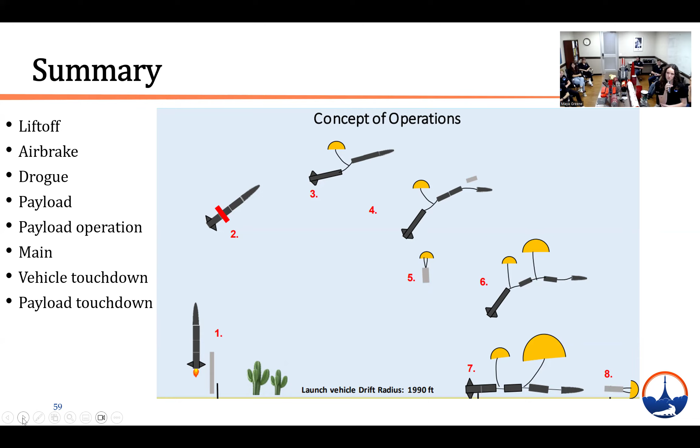Thank you all very much for listening to us talk for this past hour and share our project. I'm happy now to field questions to our leads about the project.

Our camera is also, we can take it and move it around and show you some things up close if you'd like to see, so we're happy to do that as well. We just left it up there for the presentation, but we can take it down and move it around to show anything that we have on the table here.